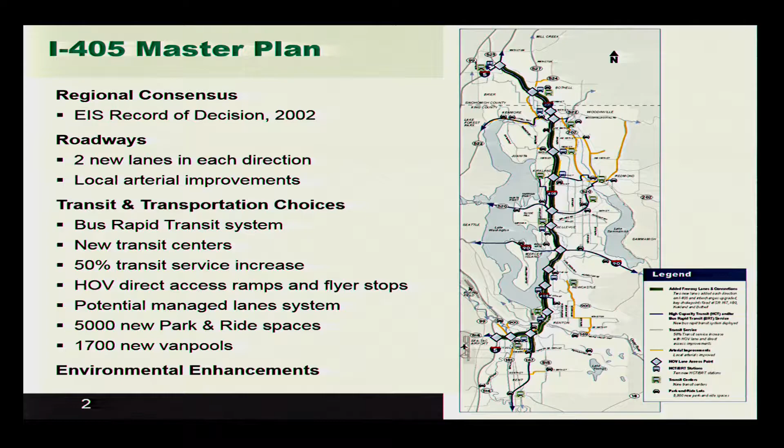I like to start every presentation off with just a reminder that we do have a master plan here in the corridor. It's a multi-modal, multi-agency plan, and this has been guiding the direction we've been going since 2002. We've been tracking progress against all the different agencies that have been working on this plan, and we've been making a lot of great progress. This here shows projects that are either completed and or funded.

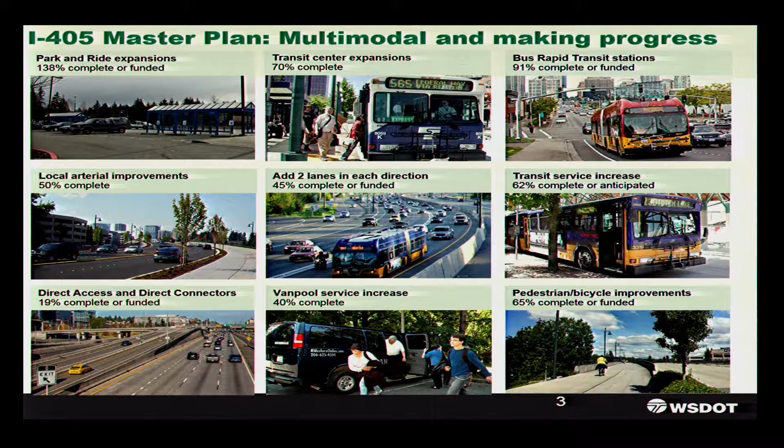So with the dollars that came in from the legislature with Connecting Washington, we're able to really move forward with some additional capacity here in the corridor, which is badly needed. But we've also got Sound Transit working on bus rapid transit now as a result of the ST3 package. And so that's really a very, very important component of this corridor as well.

One of the parts of the master plan talked about the benefits of express toll lanes. It was not fully adopted in the original part of the plan, but there were provisions to continue looking at it. The legislature asked us to put together some specific studies and then adopted the plan to move forward in 2011. And that plan was a result of the recommendation from our executive advisory group here in the corridor. And it's an express toll lane system that stretches from the King County, Pierce County line all the way up to I-5 at Lynnwood. And on 167, we have the HOT lanes as they exist today.

But then you see right in the middle of the map there, that orange section, that's the section from the 405/167 interchange all the way up to downtown Bellevue. That piece is not yet constructed. That's the piece that just got funded, and I'll talk a little bit more about that as we go. And then the rest of it from downtown Bellevue on up to I-5 is the section that opened 2 years ago. And we have a 2-lane section that stretches from downtown Bellevue all the way up to 522, and then a single-lane section very similar to what we have on Highway 167 from Highway 522 and to the north.

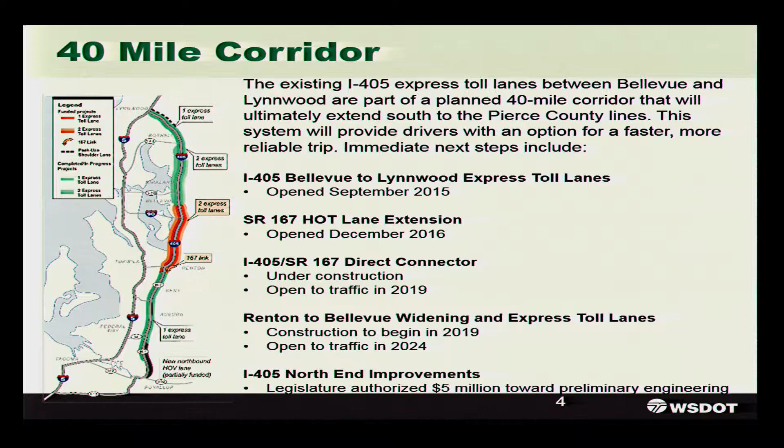The free flow trip takes about 16 minutes, but right now it's been averaging 27 or more minutes. Really over the last year, I think we're even quite a bit higher than that. And so we continue to see a lot of growth as people move into the area, and we continue to see job growth. That's going to continue on into the future, and so we do not have any kind of reliable trip right now in either the HOV lane or any of the general purpose lanes.

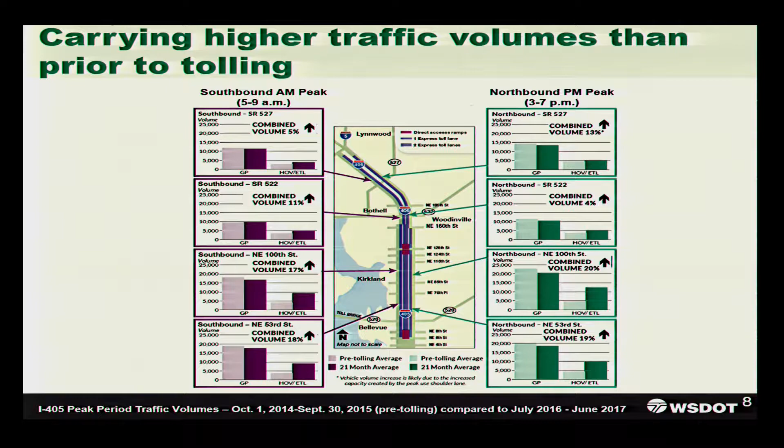You see just overall volumes being increased both in the general purpose and the express toll lane combined, because we have drivers that would normally have been in the general purpose lanes or the regular lanes making a buy decision and getting into the express toll lane. So we see anywhere from 4% up to 20% increase in volumes up and down the corridor getting through since we opened. And I also like to point out that with the tremendous population growth Kim had alluded to, since the express toll lanes opened, we're still getting more volumes through than prior to that.

Speed performance. This is for the section between Bellevue and Lynnwood, broken down between single lane and dual lane. Those percentages refer to the amount of time we have over 45 miles per hour operating in the express toll lane. So you can see we easily meet the 90% metric over in the dual lane section. In the northbound section, we've gotten great improvement on the performance in the express toll lane since the peak use shoulder opened in April. We had the peak use shoulder project open to help operation in that single lane section where we had struggled, and you can see it's really helped us.

But the southbound single lane section continues to struggle because of the popularity of the express toll lane and the limited cross section for folks to be able to use that. So it does drag down the overall metric. But between April and August, you can see we're meeting 86% of the time over 45 miles per hour in the express toll lanes. And I also like to point out that prior to opening of the express toll lanes, the HOV lane was only meeting that standard 62% of the time. So it represents a pretty good jump in performance after the express toll lanes opened, providing that reliable trip.

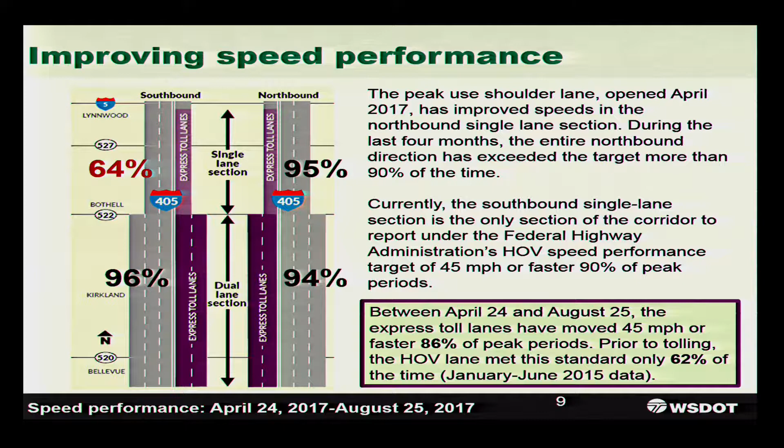Next, revenue performance. Since the express toll lanes opened, $38.6 million of revenue has been brought in. 13.6 was to cover operational and maintenance, leaving $25 million to be reinvested in the corridor, $11.5 million of which was invested in that peak use shoulder project that I just mentioned. So one of the performance metrics that is in the legislation is that it should meet our operation and maintenance costs, and it clearly does that, and it leaves $25 million for reinvestment.

So the 2-year anniversary is upon us, as I mentioned earlier, at the end of the month. So that's why we're out talking to folks, talking about our performance, talking about where we're going. Certainly, there's going to be a lot of discussion after the 2-year anniversary and into the legislative session on the future of the project, but we're out there telling people that it's operating, it's meeting the goals that we set forth. We're operating it and seeking the performance that we can get out of it, and we're happy it's there to provide that option for drivers.

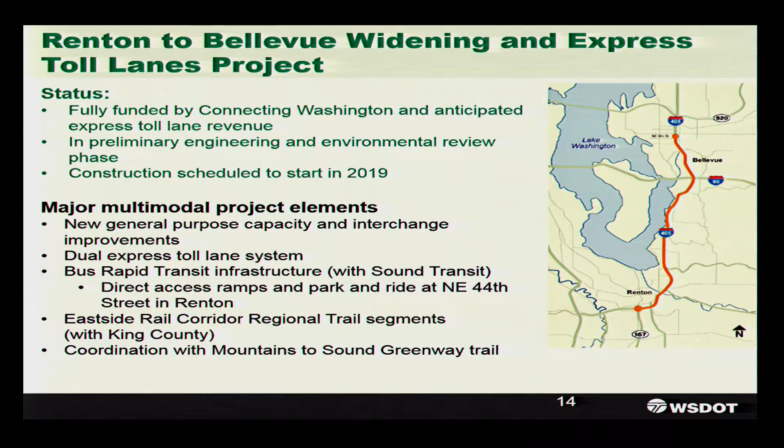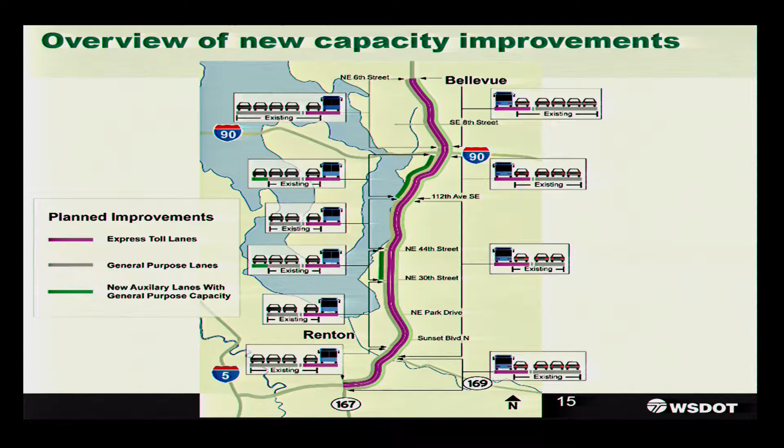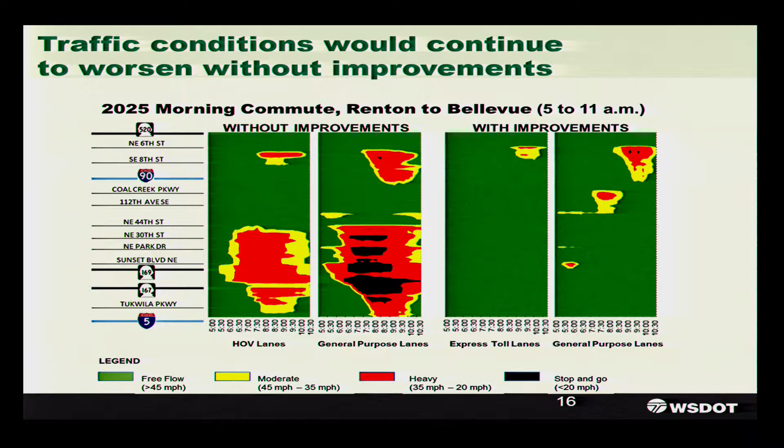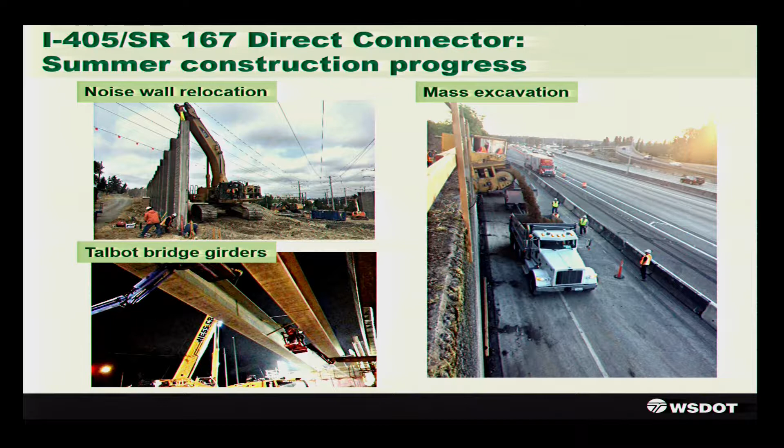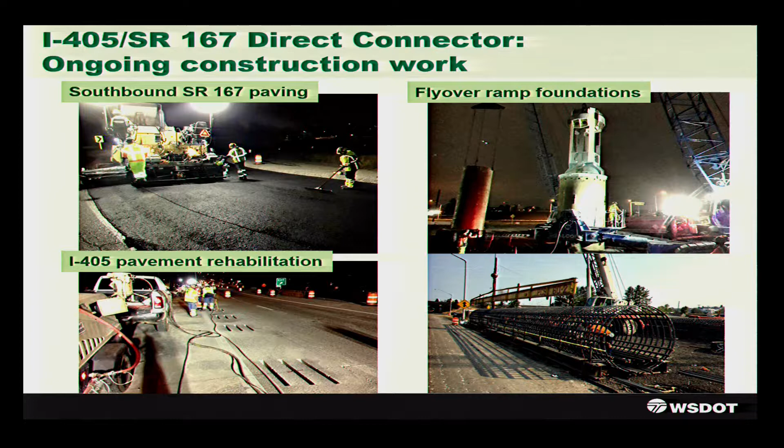Our 405/167 direct connector project is part of this whole project. It's the first construction phase to get out there. And I'm sure everybody's been seeing the progress that's been happening. That project has been going exceptionally well over this last year, and in fact so well that we'll be meeting with our contractor later this fall to talk about how the schedule is being potentially advanced. And so we don't know how much or anything yet, but right now everything's tracking ahead of schedule, and so we're very, very pleased about that.

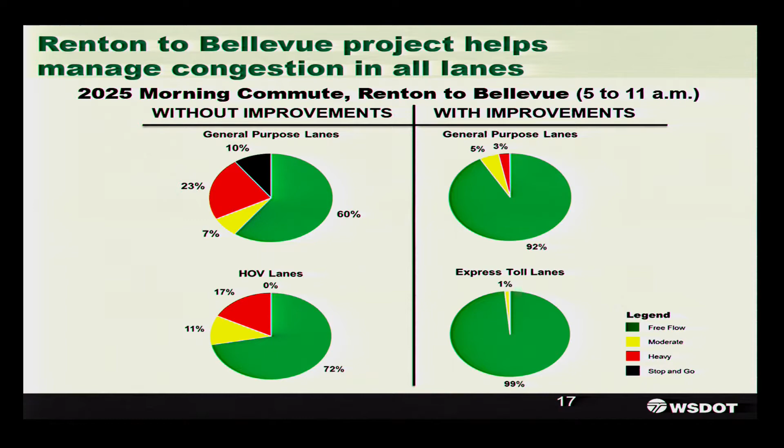I'd be curious, do you have a similar heat map available for the southbound, the evening commute? We do, and I just don't have it here in the presentation, but I imagine it also improves. Yeah, it does. The numbers look very, very similar here to what we are seeing on these pie charts. Of course, the congestion's in slightly different locations, so I just don't have that here in this presentation, but certainly can get that for you if you're interested. Sure, I'd be happy to look at it later. Thank you.